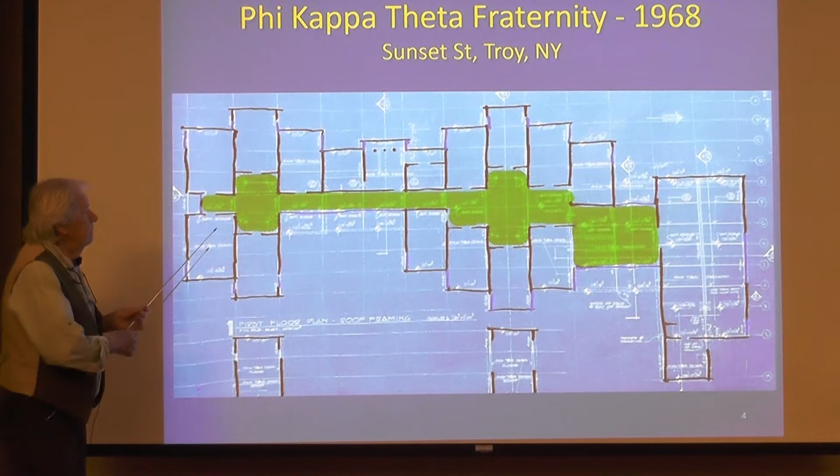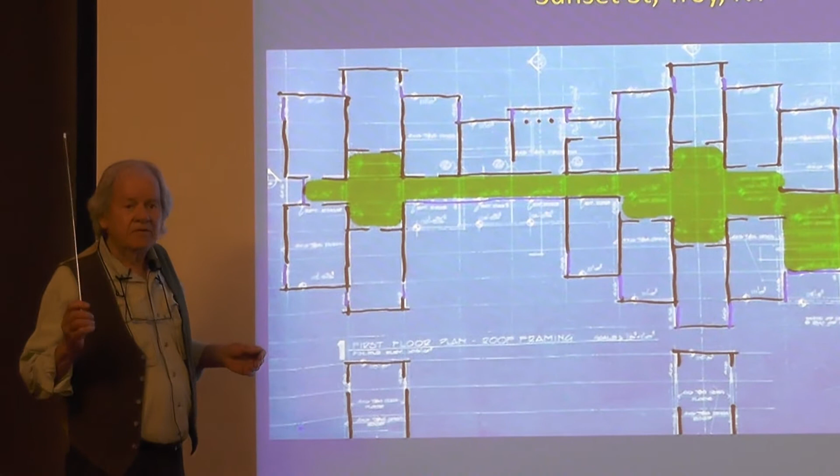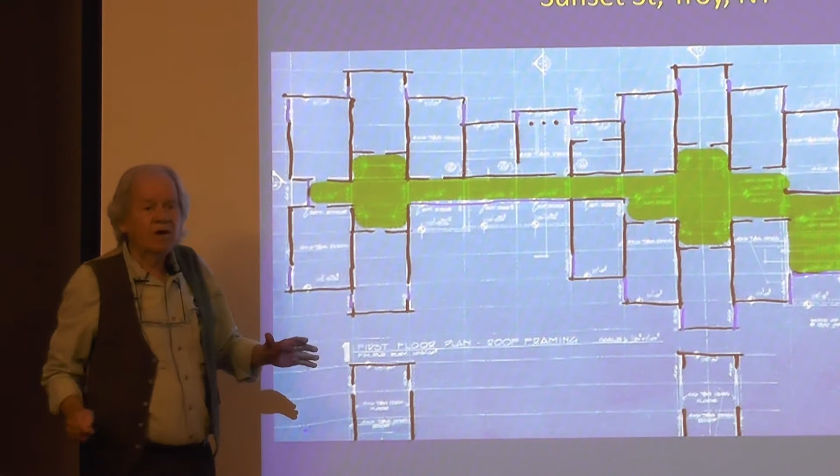Okay, next. Now, the first presentation here is the floor plan of a fraternity that we were awarded to do, and the fraternity was to have some 55 students, and the site is behind Troy High School on Sunset. The site at the beginning, here, this being Sunset, is very narrow. Over on that side, it's wide and flat and 6 or 8 feet lower.

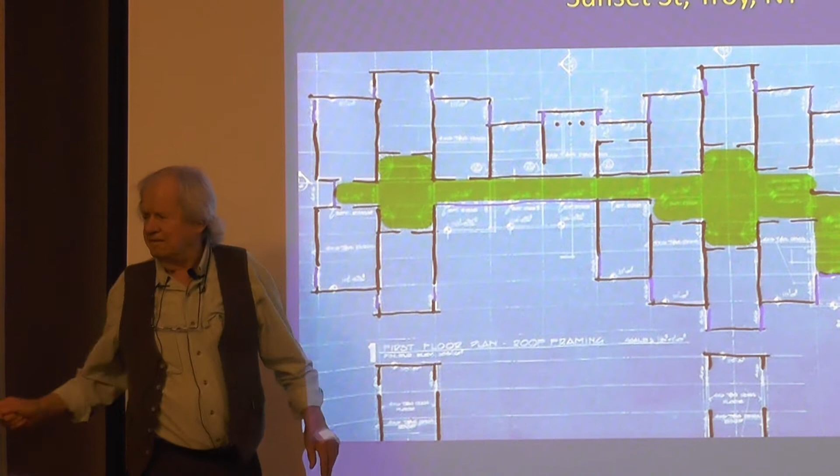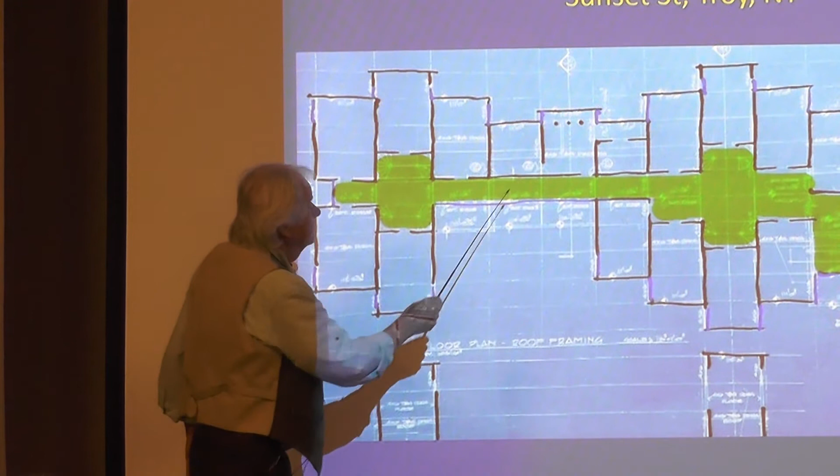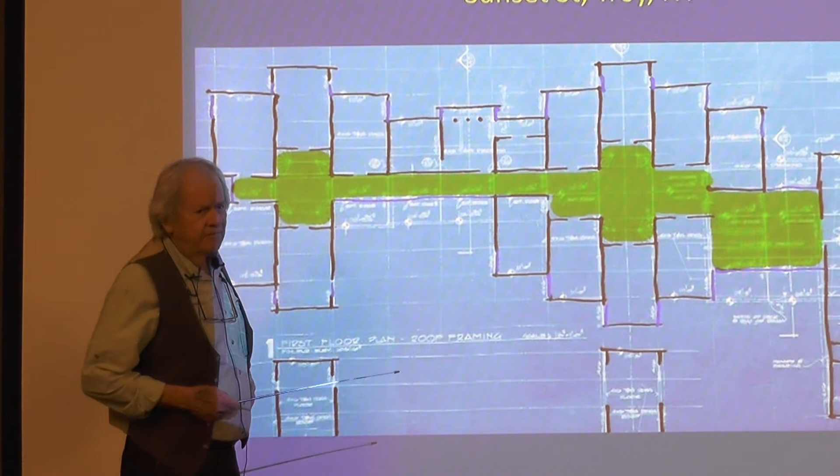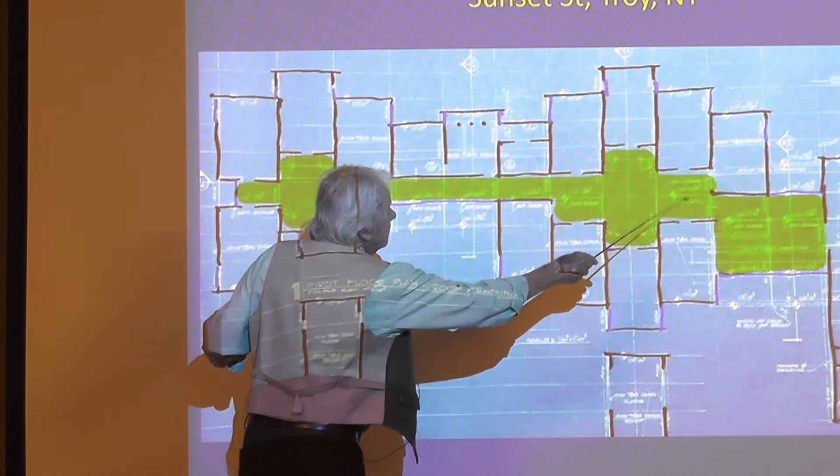And so here is the fraternity, and here are the units on the fraternity - toilet facilities, showers, and that, these units. The fraternity brothers area stops right here. There are doors there, and this was designed - it was a Catholic, it still is, Catholic fraternity, Phi Kappa Theta. And that was my fraternity, and I was told that there should be some privacy. So I put all the brothers here, and the public on this side.

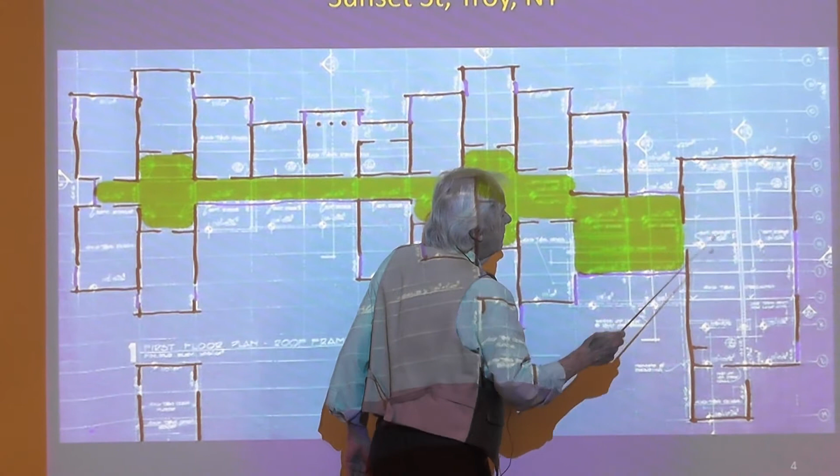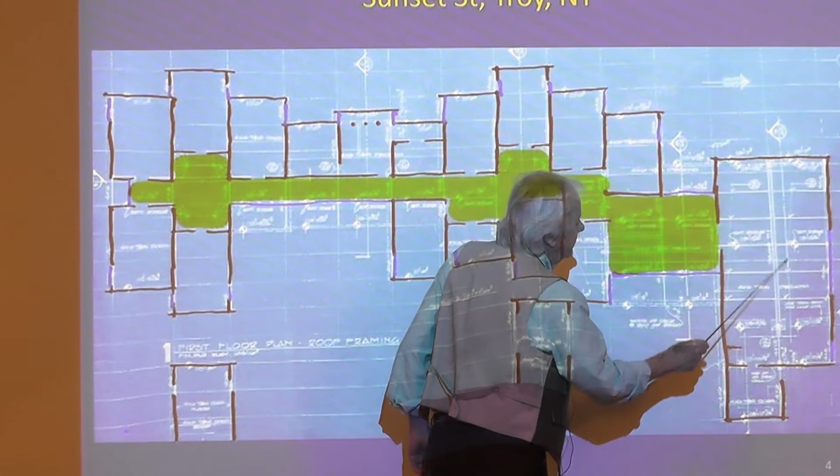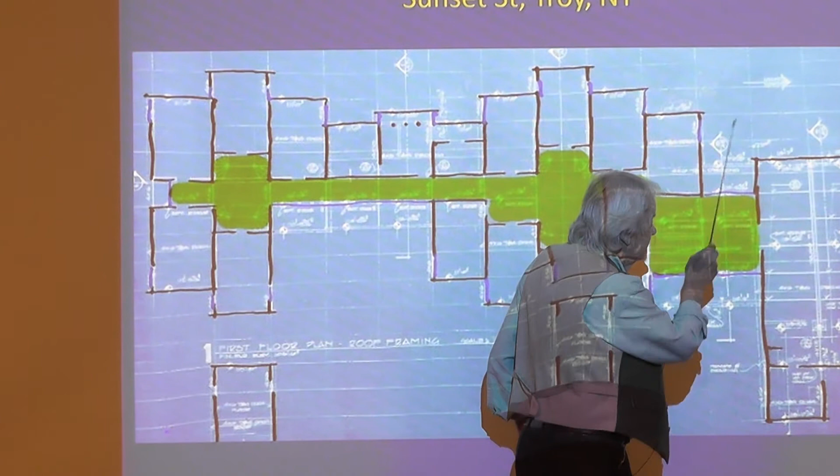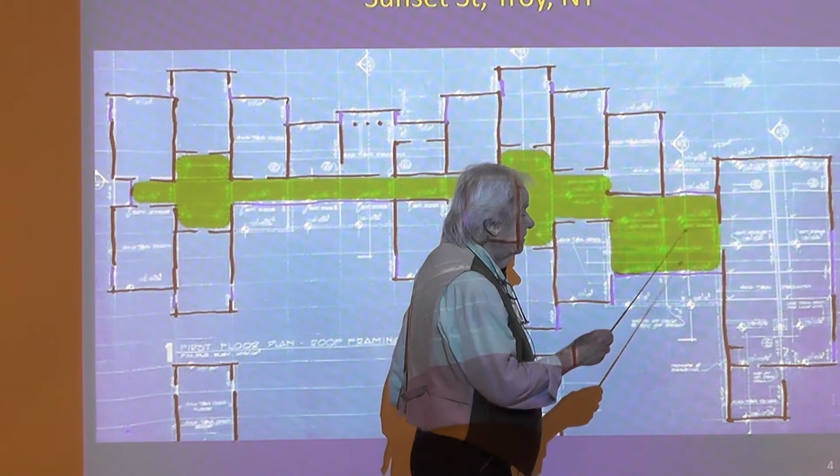And on the public side, there could be a floor plan here if I can find it. There's a sitting area with a fireplace, dining, kitchen, and storage. Below this is an activity room, this being 2 stories. The activities can occur outside, and they build a hockey rink out there, volleyball courts, all kinds of things. So it's pretty handy. Now, in here, there is 1 and 2 men.

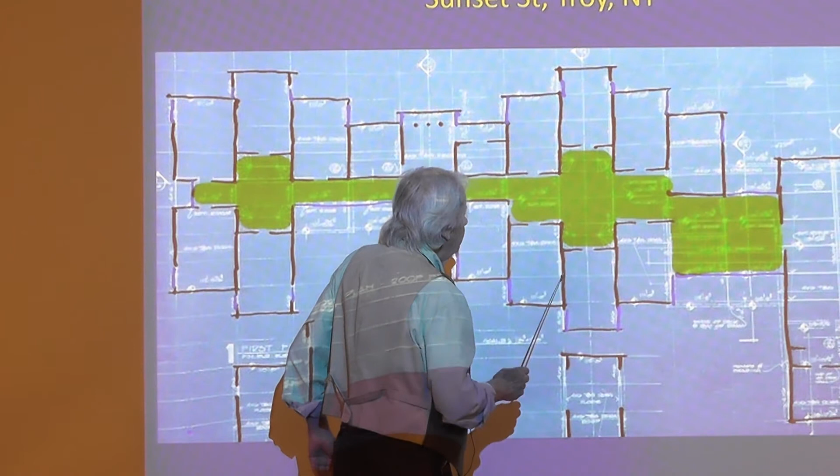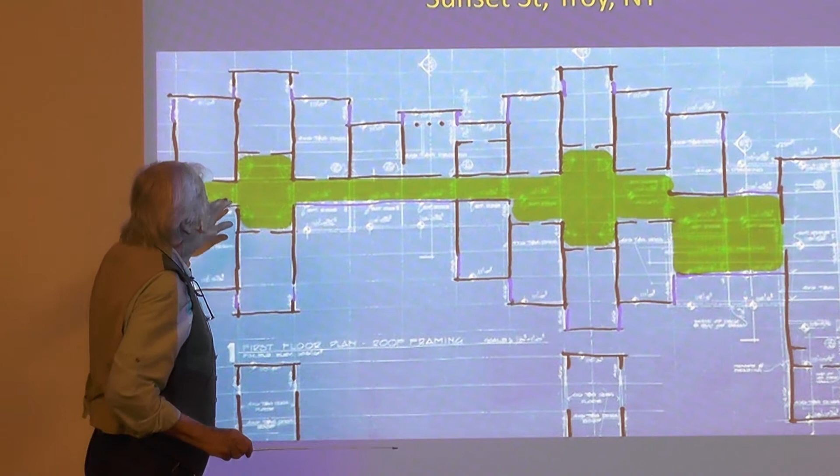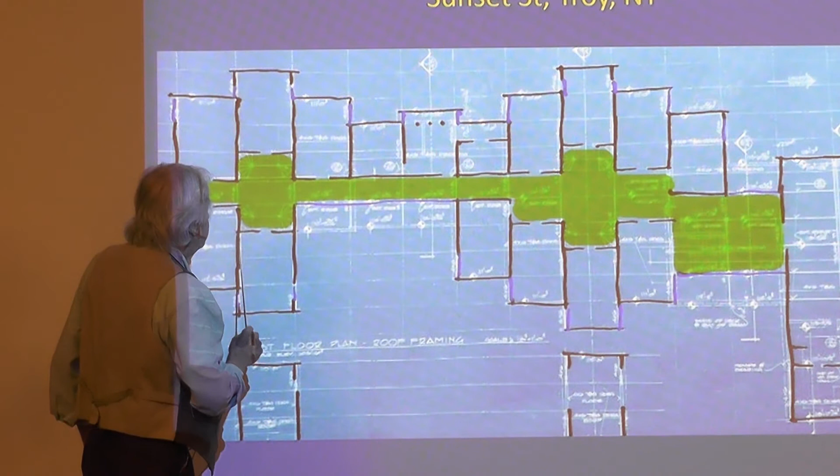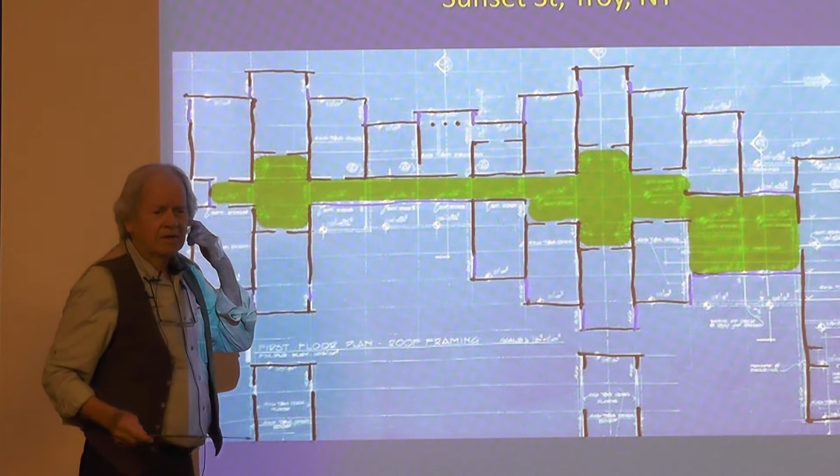1 or 2 in each room, and each room is quite private. This area here and here, I looked at this as like a street, so that the brothers could come out on this street and talk and not disturb the guys that were studying, the few. So this being a 2-story, there's a spiral staircase that goes to the next one in the balcony, and that's true all over. And then you could be watching a ball game or whatever.

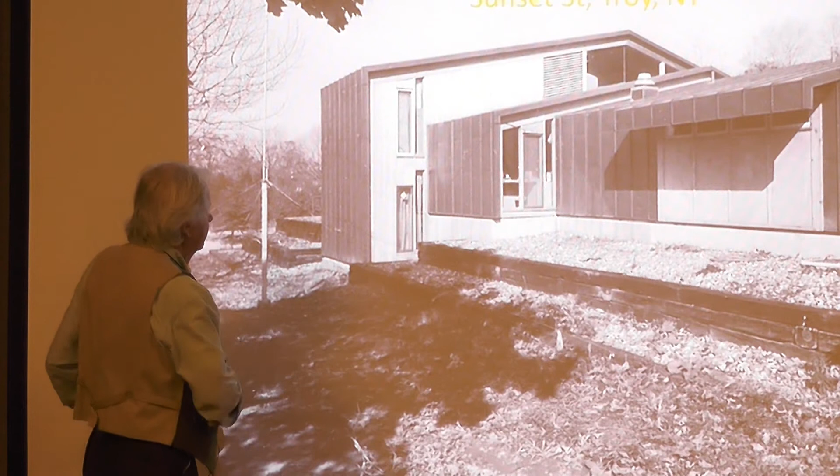Okay. And this area here faces Troy High School, and RPI campus, and down to the river. It's very good, nice view. Okay, and see, that's this view here. You're looking down Troy, and here are the 2-story buildings.

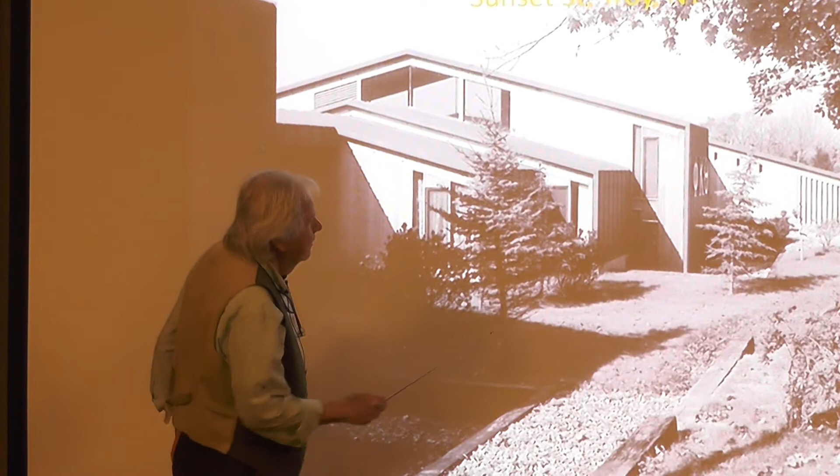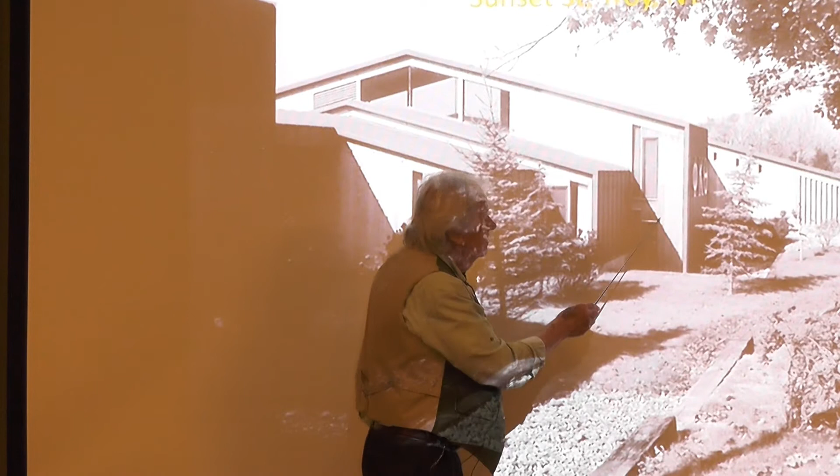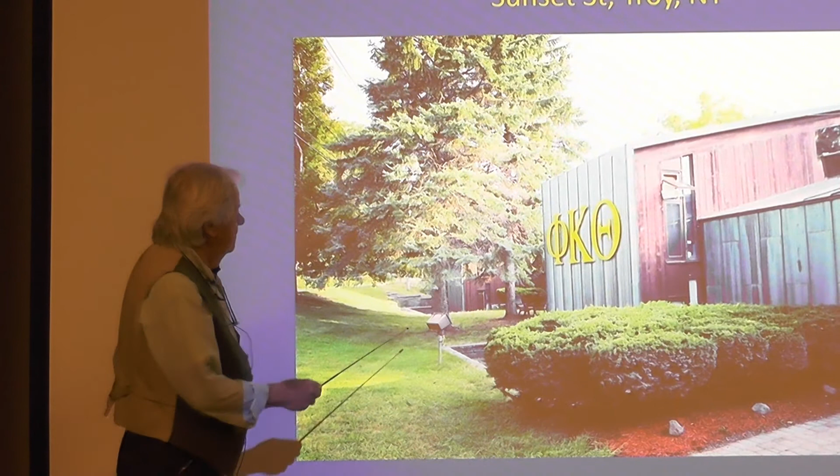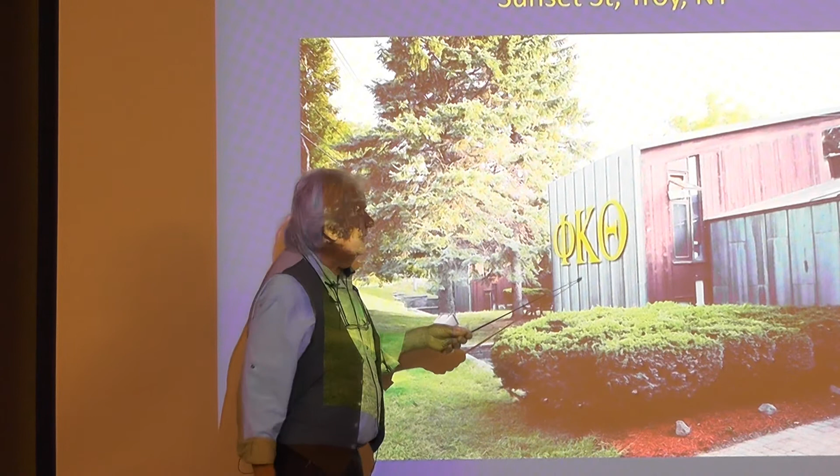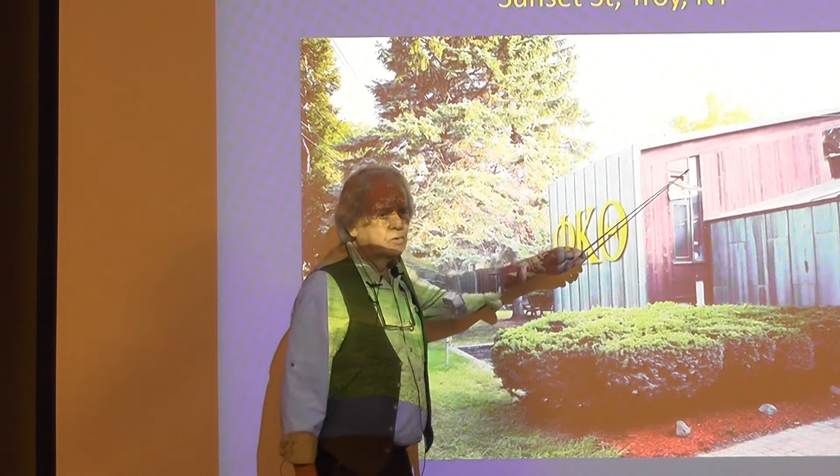And here, see, you can see these study areas where there's 2-story. The finishes on the fraternity - the roofs extend to the ground like this, and it's all copper standing seam. And the siding is wood, vertical wood installation.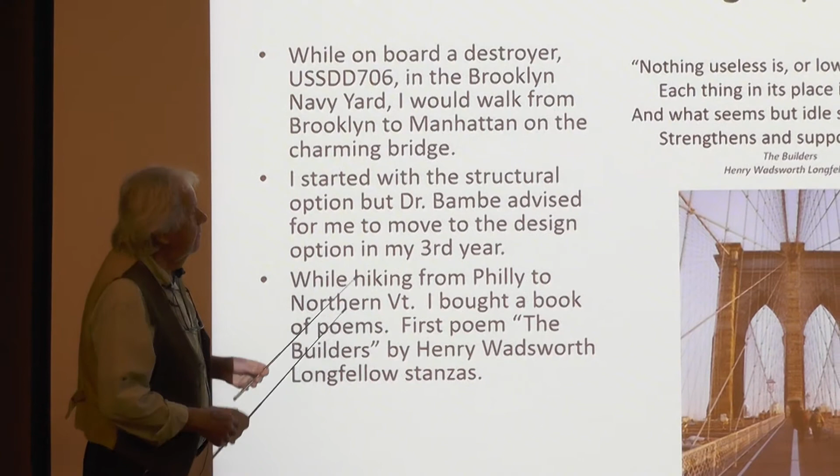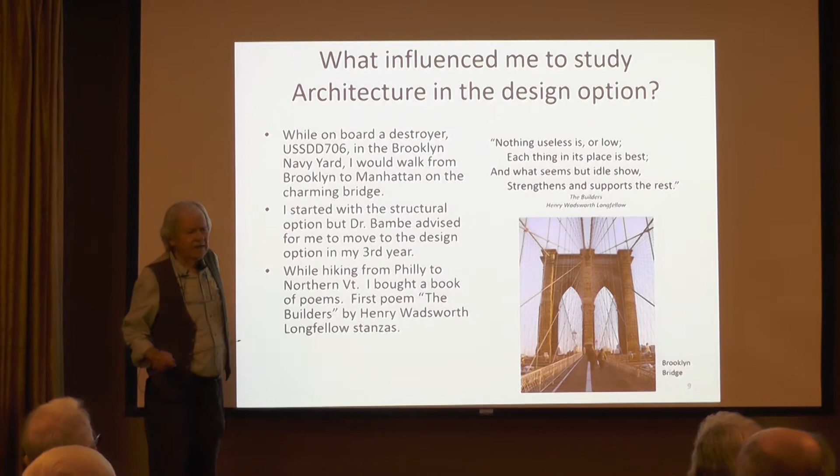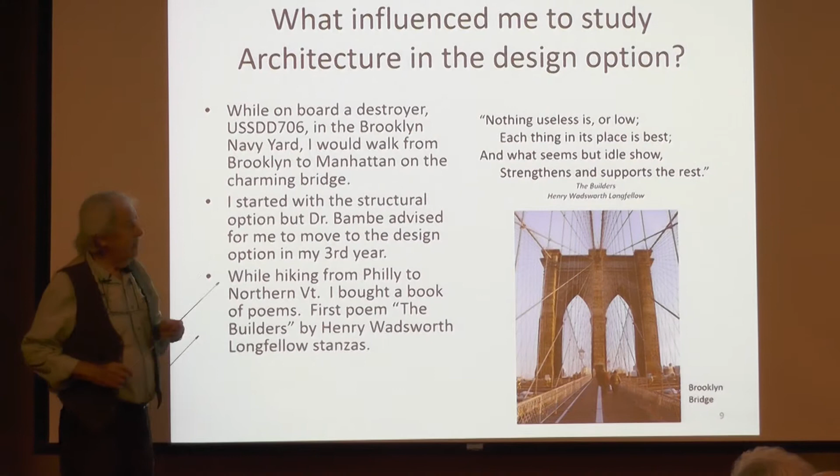Next. Okay. Now here is what I'm talking about here - what influenced me. When you go to RPI, you have an option. You have 2 options in the School of Architecture. One is a structural option, and the other one is a design option. Because of this bridge here, and I was in the Navy at the age of 17.

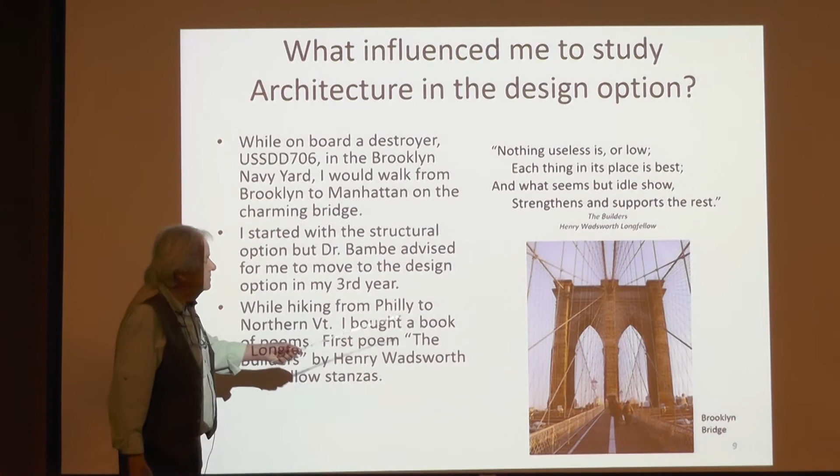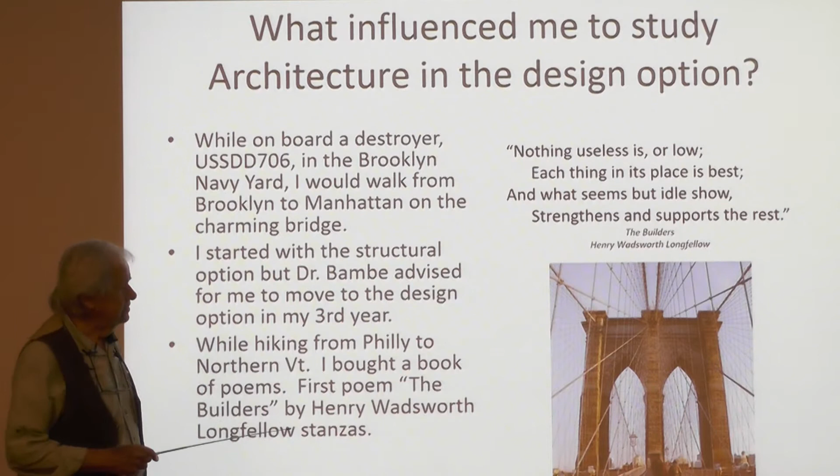I was in Brooklyn for a little while before we went overseas, and I used to walk the bridge, and then I just thought it was so beautiful. And of course, from northern Vermont, we have only wood bridges, so these cables and all that, it fascinated me. So I thought what I would do is design bridges when I grew up.

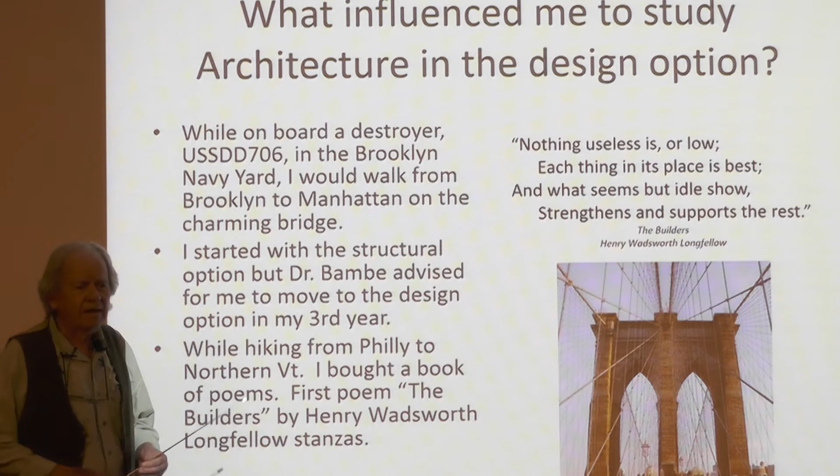And now Dr. Bambe was my professor, and he advised me not to go into the structural option. He said, you ought to go into the design option, because he thought I was a good designer. But it added a year more of schooling. And let's see, while hiking to Vermont, I would hike from Philadelphia to northern Vermont, where I live.

I stopped on the road. The guy says, where you going? I said, I'm going to northern Vermont. He said, I'm going to Bennington, but it's halfway.

There's people that sell books, and I saw this guy standing on the side of the road with all these books, including a book of poems. Mary Lee and I, we like poems, we read poems. So I bought this book for 25 cents, I think. It was a Longfellow, and the first poem in that book was The Builders. I don't know if any of you ever read that, but it was fascinating.

I always remember the second verse: nothing useless is or low, each thing in its place is best; what seems but idle show strengthens and supports the rest. This is a poem, it's a poet, not an architect. You see, when we say architecture is an institution, you know. So that's how come I got into where I am now.

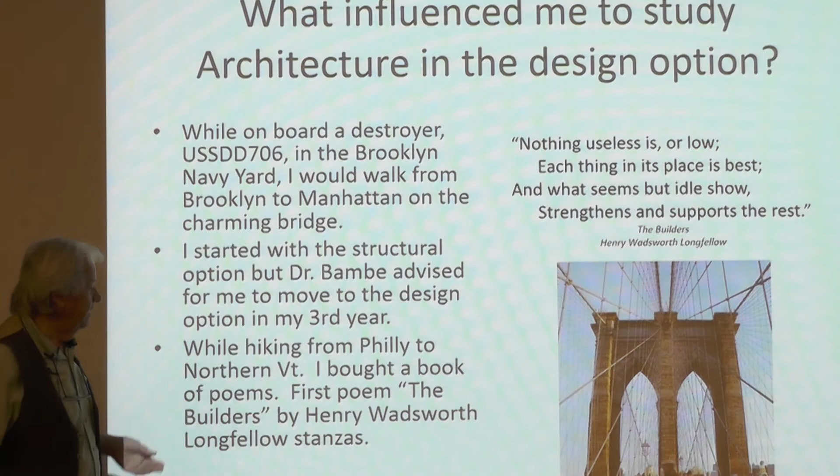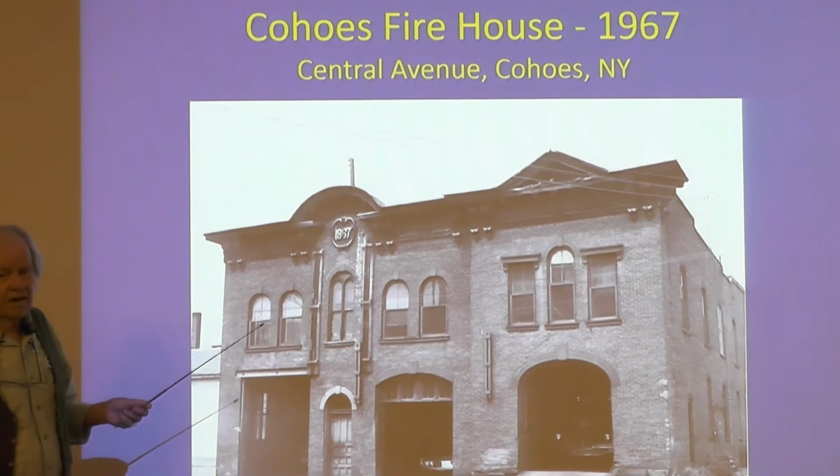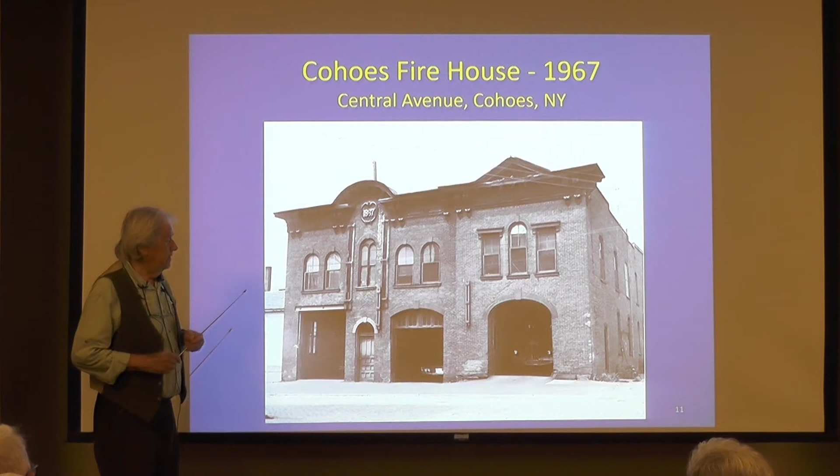Cohoes Fire House. This is the existing firehouse. Cohoes, through a lot of our work, got an award to be the model city in Cohoes. Anybody from Cohoes? Probably, yeah. So they got a lot of money from the government, and one of the funds went to the chief here, and he wanted a new firehouse.

I had a friend I taught with at Hudson Valley, Paul Van Busker, and he told me about it. I came down to see him. He told me he had this fund, and they wanted a new firehouse, and they wanted the firehouse to have protection.

This was, let's see, 1967. Yeah, it had protection from radiation, and they call it the PF factor. The PF factor for this building had to be at least 100.

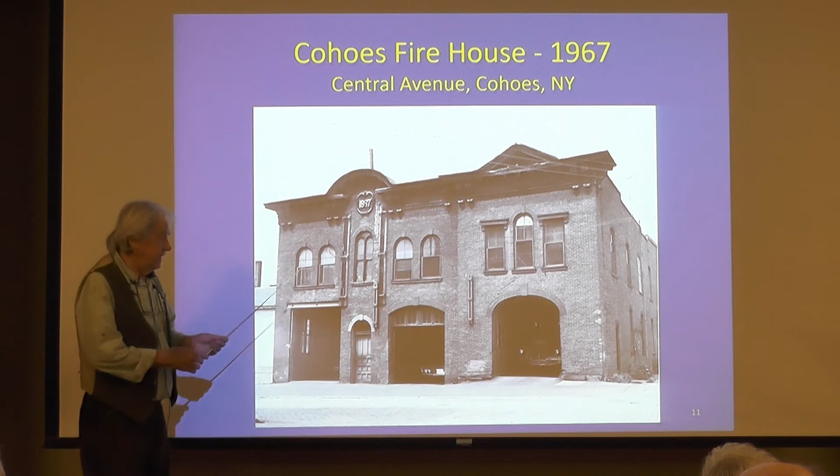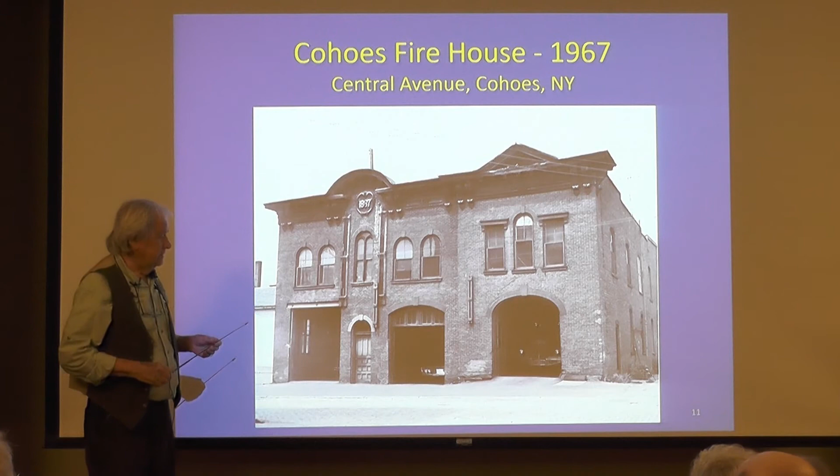That was not easy to achieve, being that the part that's going to be underground will have to be supported from the first floor, and the first floor had quite a few bays. So in order to do that, okay, next.

Now we found that the PF factor, the protection factor for the floors, had to be 100. So that is very heavy, and we wind up having a lot of columns in the basement. So I thought that what we should probably do is try to avoid that.

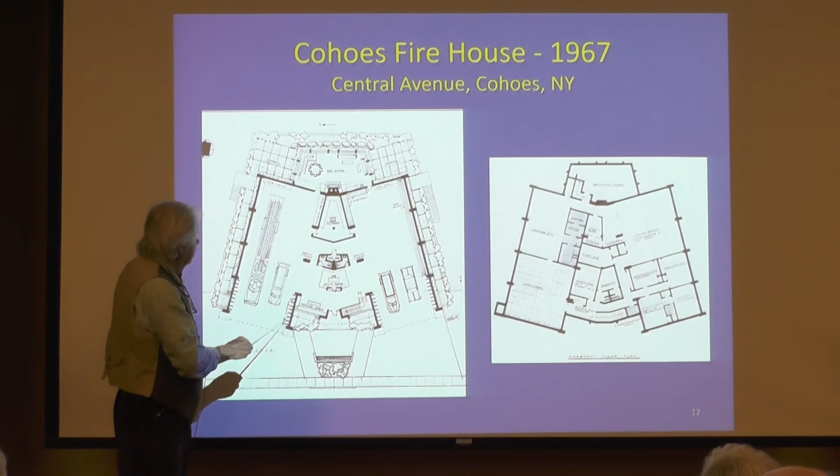In order to do that, we have these columns, and we span the, let's see, the next part. Oh, yeah, this is a working drawing. And this tells the contractor what to do, gives all the structures, all the reinforcing rods and whatever.

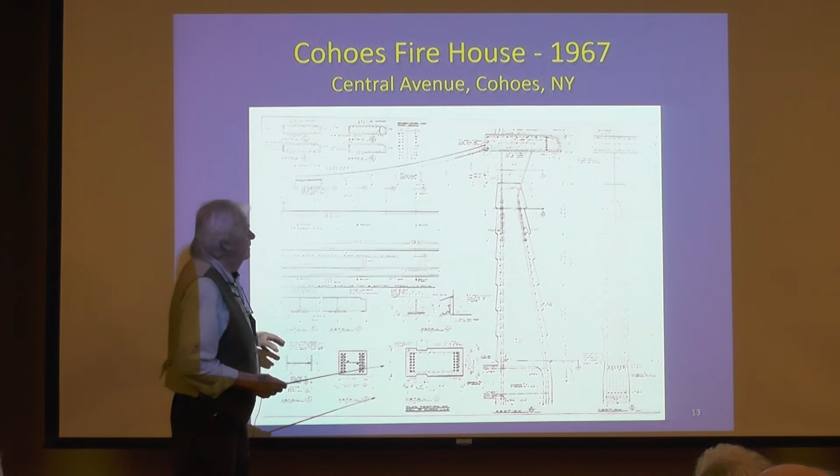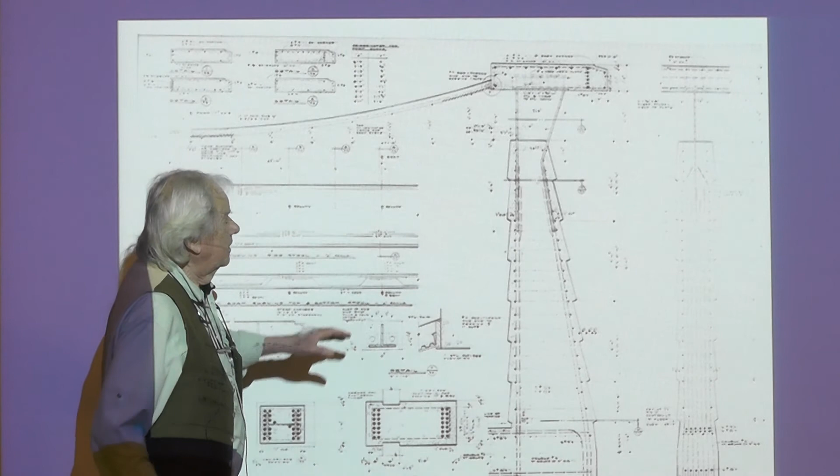It's kind of neat, I think. Now, see, this is the column, and what we did is we hung the roof between the two columns. Then as we pulled on these columns, it put pressure on the floor, and it crushed the floor. So we took the roof load through this beam down to here and put it in the floor, and that gave us enough power to be free of columns in the basement.

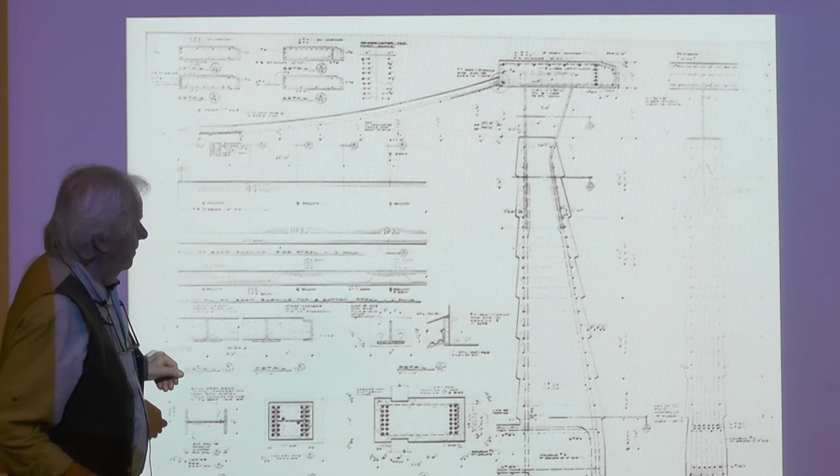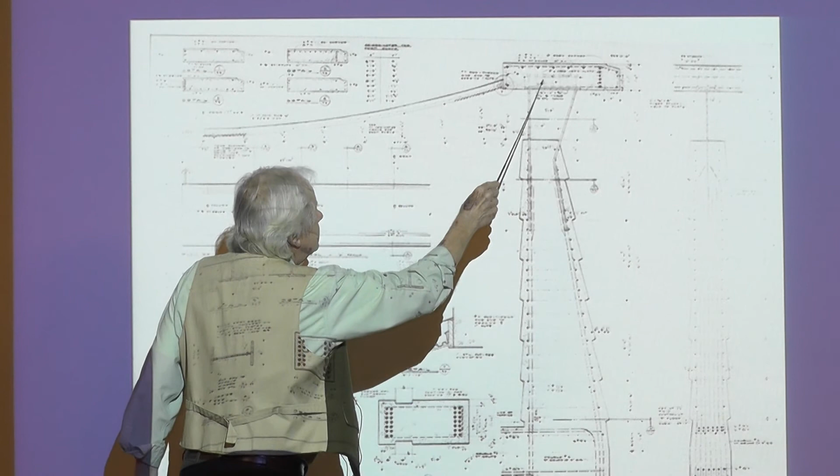So that was a big deal. Now, okay, no, I'll say this. You see, this right here is a beam that's holding the roof, but as the roof is transferring its load down, we turn the beam. Normally, what you would have is a beam this way and bar joists or whatever, you know. But I reversed that and took advantage of that force, brought it into the slab.

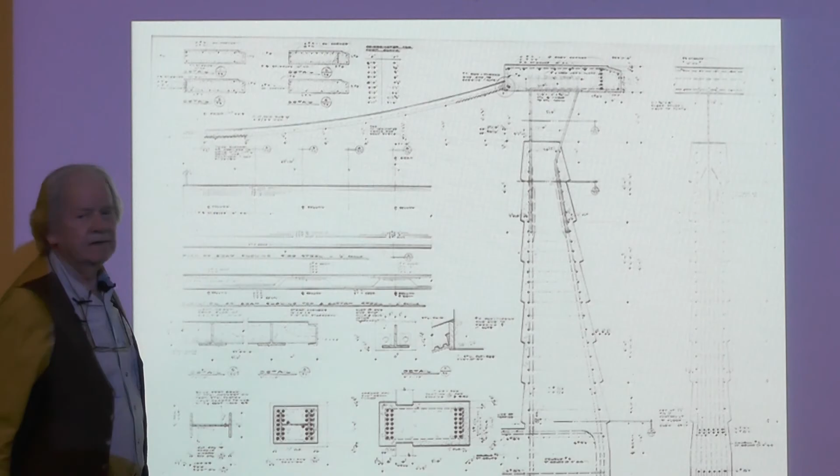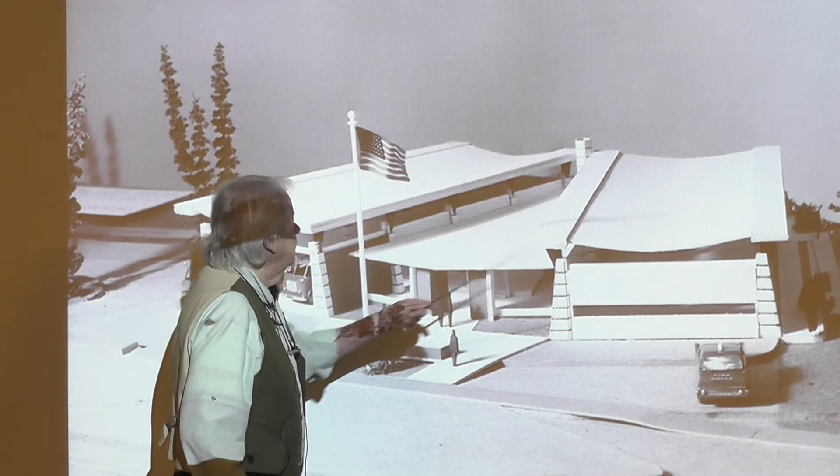Next, see here, this is a model, but you see here are your flat beams, and then here's your roof suspension between them. Okay, next. Now, the site was on the Erie Canal.

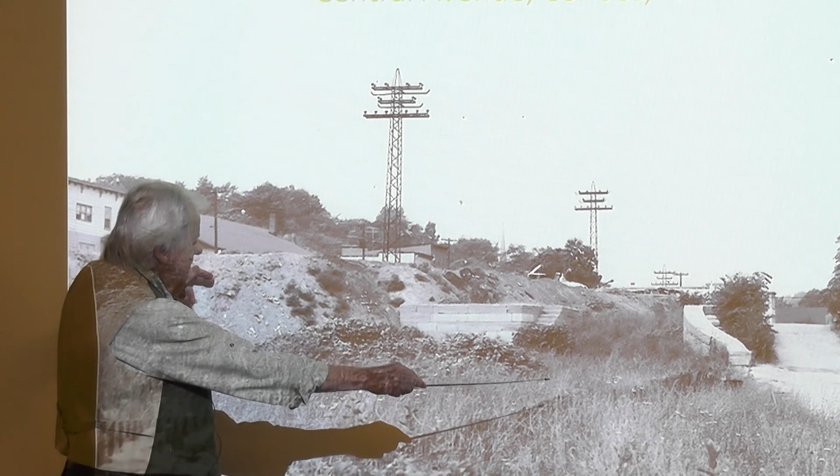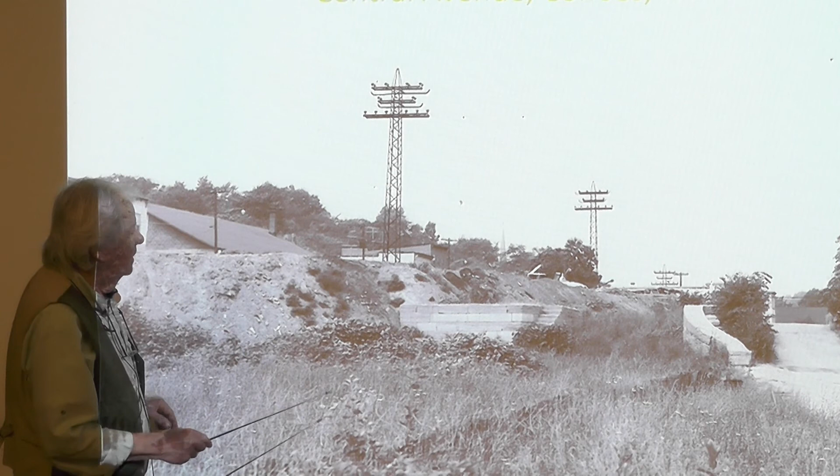This is the Erie Canal. It's full of junk now. Well, it got filled up over the years. This is not something new. So when they gave us the site, I looked here and I thought, to set the firehouse on top of this I would save all the footing costs. So this is what I did next.

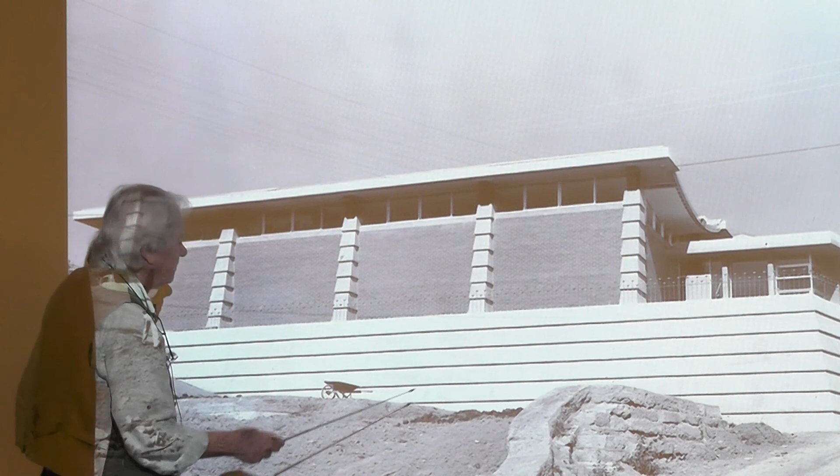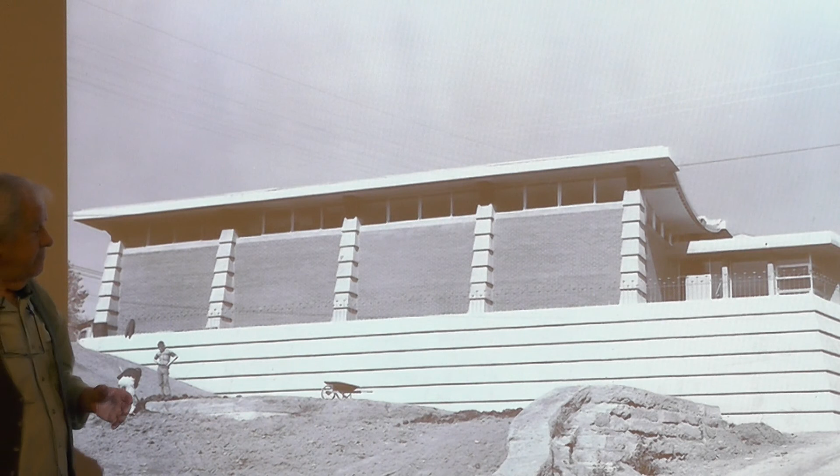And this is not a model, it's the real thing. And here is your walls of the Erie Canal where the locks were. Now you see all these lines - the chief, when I first met him, told me he liked colonial buildings, you know, drop siding type of stuff. Oh, okay, so this is an exaggerated drop siding made out of concrete. He didn't say anything. Okay, next.